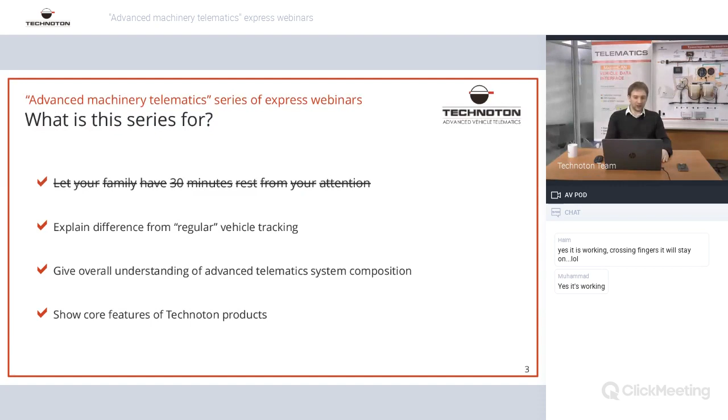Again, I don't know what's happening with this, probably this delay is due to internet connection. So briefly, I'll go through the Technoton company. A few words: Technoton was established in April 2000. Later this month we're going to have our anniversary, 20 years on the market. That's quite a good period of time to be on the market, and hopefully later this year we will celebrate it. You guys are welcome to Belarus, welcome to Technoton, to see us, to have some talks, discuss some projects, and also, if possible, to have some fun together.

At this stage, at Technoton we have around 15 main product lines. Later on, this presentation will go through the main product lines. I don't want to talk about the accessories, because in total there are more than 250 items positioned in our product portfolio. At this stage, we are supplying products to more than 140 countries worldwide. At this moment we have 600 plus partners, integration partners, so-called. We're also attracting more interesting and sophisticated ideas from our partners to gain new targets, new projects together.

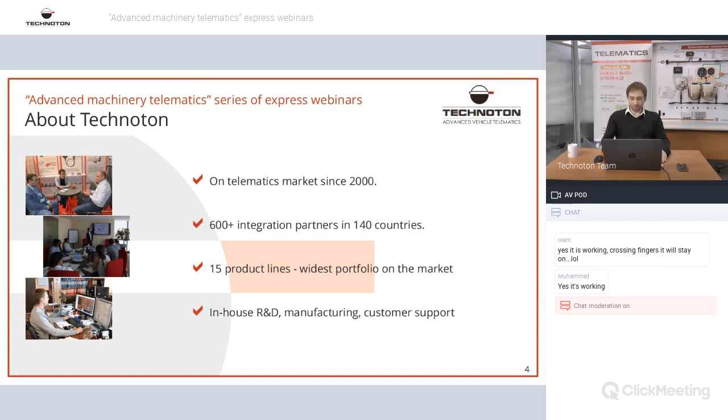Now let's talk a little bit about the different market niches, the current market niches that the majority of telematics companies and fleet management companies are targeting. That's mainly the market of trucks, market of vehicles in general. Some partners also enter diesel generators, cellular towers, some marine markets, more or less. But very few partners are doing really sophisticated and interesting projects that require more than standard tracking or geofencing. I suppose every company doing fleet management business does tracking, speeding, fencing, it's like a must-have, like air, it must be there. But we want to attract attention to other interesting markets, so-called advanced machinery telematics markets or advanced vehicle telematics. Later in this presentation we'll see what other markets, what other market niches I'm talking about.

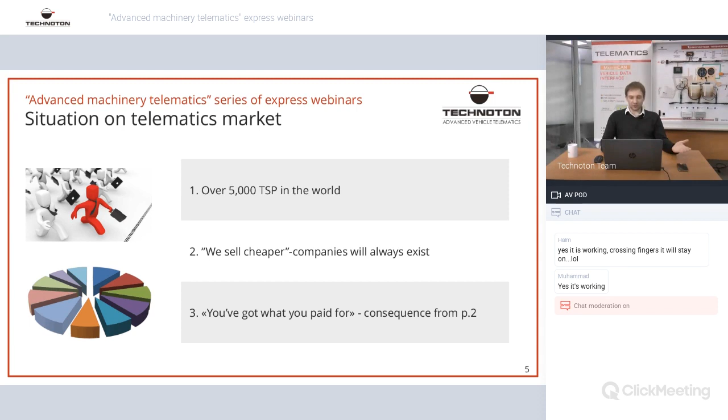So here you can see market niches that we also should consider, comparing to just the regular fleet management that usually includes tracking, maybe fuel level sensing, so tracker plus some simple fuel level sensor. We allow our partners to expand the system, to expand market niches, expand the product portfolios, and obviously expand possibilities to make more money and to make clients happy.

So here we can see on this presentation slide that agriculture market, railway transport, vessels, either river vessels or sea vessels. It's quite interesting market that's underestimated from our point of view, because we already done several successful stories on vessels. Imagine the vessel usually got at least two main engines to drive the vessel forward, but there are also additional engines for keeping different machineries running on the vessel, as well as diesel generators installed on the vessel.

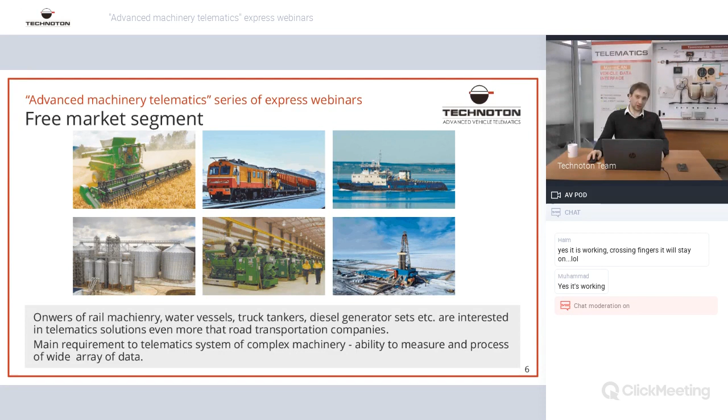So also you can see here different applications like granaries, where we can monitor moisture, temperature, consumption of the burners, etc. Interesting and huge market of diesel generators - you can see it here on a picture. Oil, gas and oil market, like here on a picture. So that's just a little part of the market that we're attracting our partners to enter together. This list is quite bigger than just on this slide.

Obviously, complex machinery segment is not easy from the first glance, and some of the partners, when they just get used to simple tracking business, they're afraid. They see like one engine, another engine, a lot of pipes, a lot of fuel tanks. They're just afraid - they don't want to even start any project there.

We are assuring you guys that with our help, we can make any successful project together with the help of our business development managers, with assistance of our technical team. Together, we definitely can make these projects run well. The 51%, I suppose, is just the worry, the client's fear. So when we pass this 51% of fears, then 49% is just success. Together, definitely we can work on these projects and make the maximum of that.

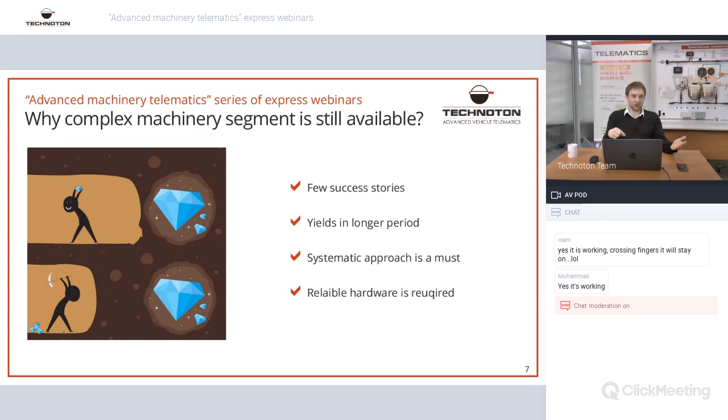And as I said earlier, the partner first needs to understand that it will require time, it will require skills, it will require a lot of assistance from our side, but we are always also open to help work on it together. Just because we see the potential, and a lot of market niches are just underestimated, and they're waiting for us.

I don't want to spend too much time reading or explaining, but there's a huge difference between advanced vehicle telematics and regular vehicle tracking. There are different targets, different goals, different scenarios of equipment, and different parameters that we can obtain.

Obviously that's a completely different story. Advanced vehicle telematics is like a spider net. There's one core unit, a so-called tracking device, controller, or terminal, that links multiple devices: fuel level sensors, fuel flow meters, temperature sensors, CAN bus, analog sensors, all connected to a single unit.

Majority of you are already working with some tracking devices from third-party manufacturers. That's totally fine. We are open to discuss possible integration of our devices with existing tracking devices that you already have. Please don't be afraid of that, and ask your sales manager if there's a possibility to integrate a tracking device from this manufacturer with your fuel level sensor and flow meter.

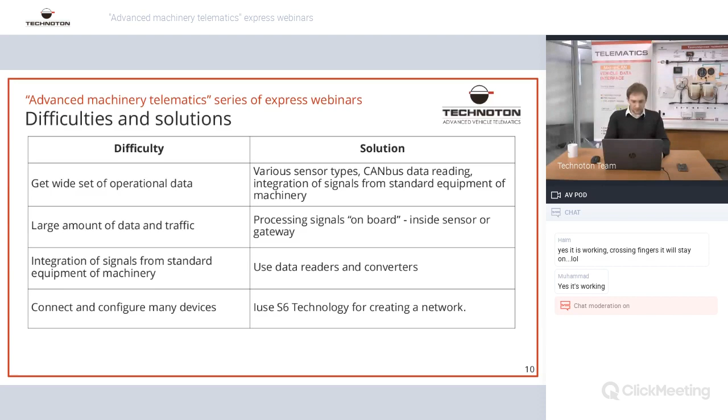As I promised at the beginning of the webinar, here you can see the pictures of our main product lines that we've been producing for years. Our main focus is the manufacturing and production of IoT sensors: fuel level sensors (DUT), fuel flow meters (DFM), contactless CAN bus readers, vehicle data interfaces, different kinds of converters, displays, etc.

Obviously we also do telematics devices, tracking devices, but that's an additional business, not our core business. We should follow the current trend on the market, see what's going on there, and make sure the equipment is running well.

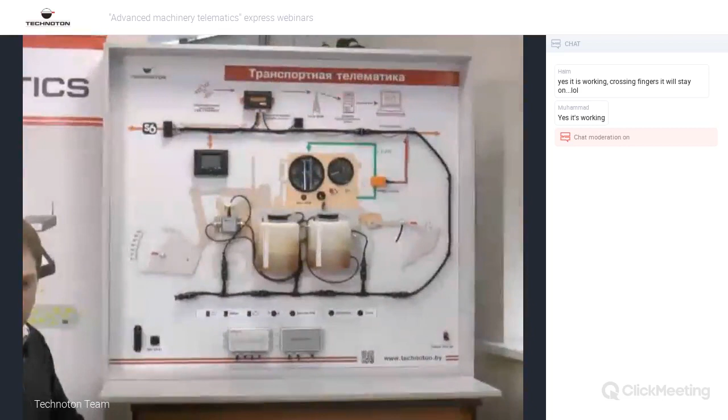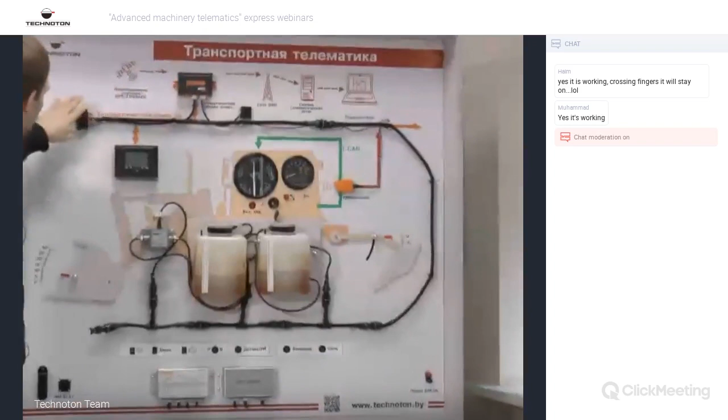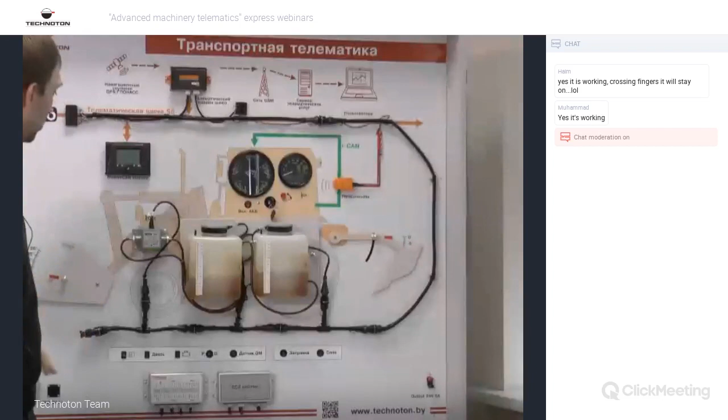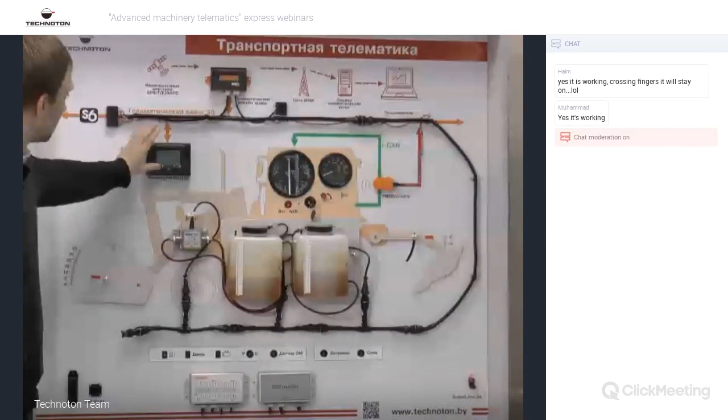Behind me on the left, you can see an example of the system we're using on a tractor. The core of the system is a gateway telematics unit, and we use a single CAN input on it, connecting multiple devices. On this tractor, we get data from the CAN bus using the CAN Crocodile reader, and we monitor fuel level in 2 tanks, and also get actual engine fuel consumption information, displayed for the driver if needed.

The idea of S6 technology is that we use a single cable to connect multiple devices together. No need to worry about the quantity of inputs on a telematics device. Either there's just one RS-232, or one RS-232 and RS-485 interface input, or a couple of analog inputs, and you're worried there's no way to connect more analog sensors. With the help of the S6 system and different converters, master CAN, we can connect multiple units to a single CAN input on a telematics gateway.

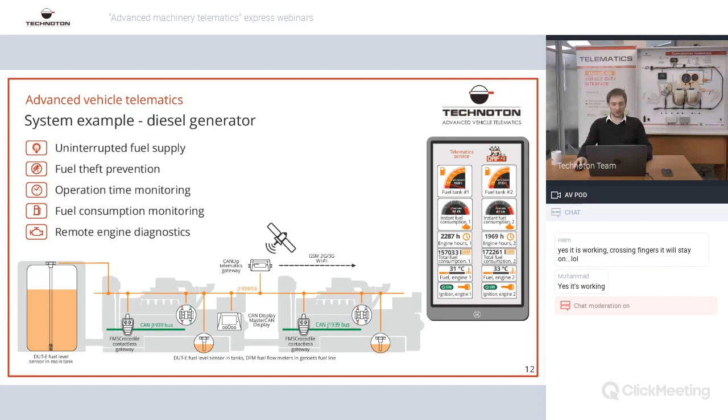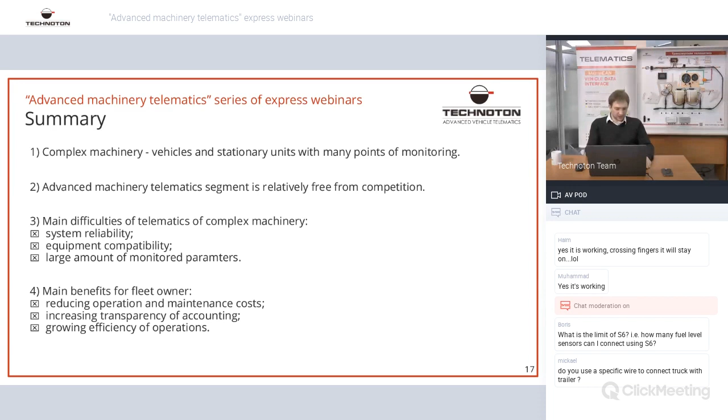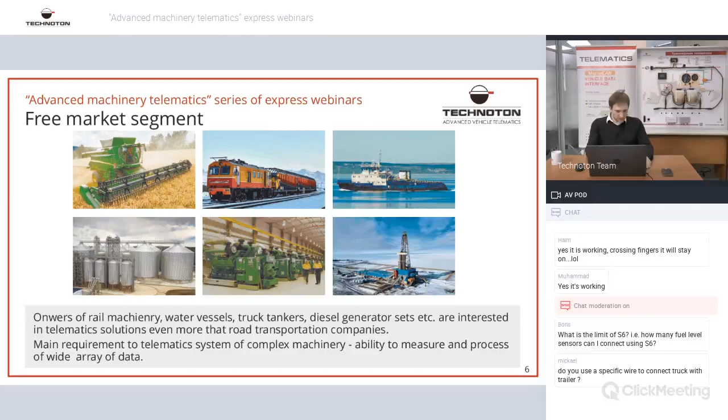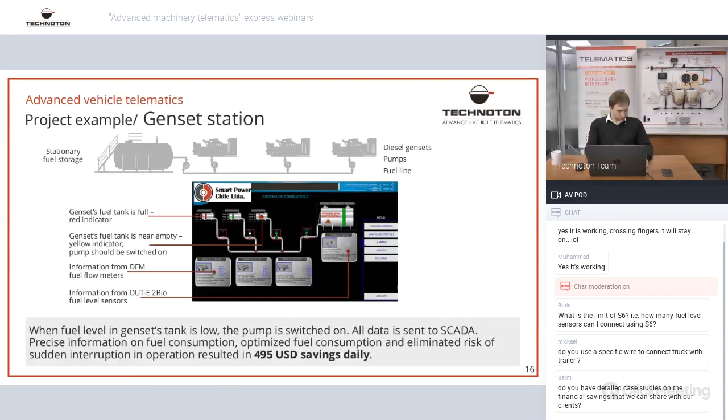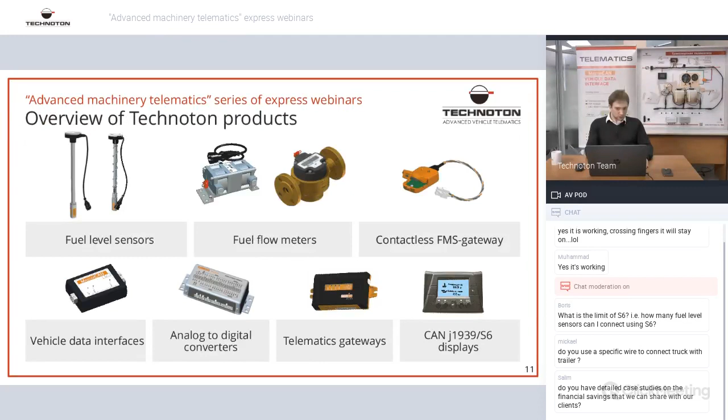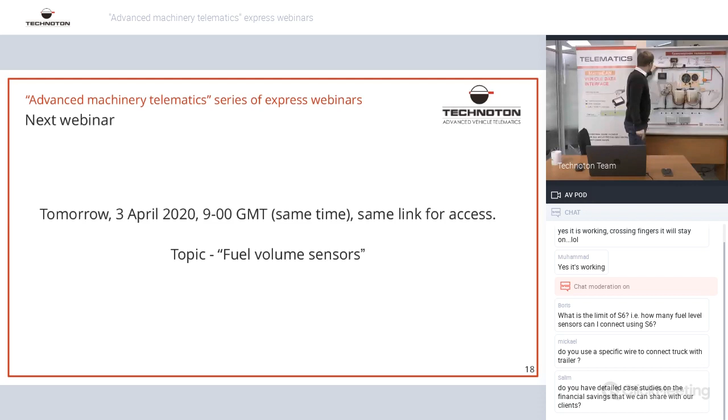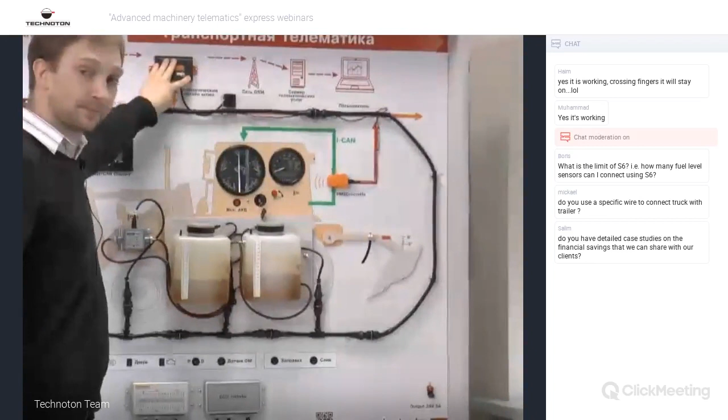So, S6 technology - we have a good example where we can connect multiple devices to a single input on a telematics device using a single cable, using different splitters and T-connectors. We link it with a single CAN input on a telematics device. The idea is that each device gets a unique network address, and the Telematics Gateway identifies them as different devices.

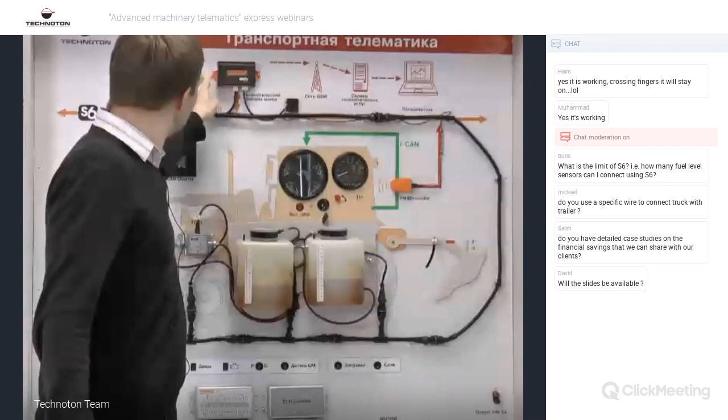IoT Edge technology is more about processing data inside the device - inside, let's say, the fuel level sensor or flow meter. So, to keep it short, raw data comes to the device, and just the useful parameters are sent further to the web server. S7 technology is all about wireless BLE sensors.

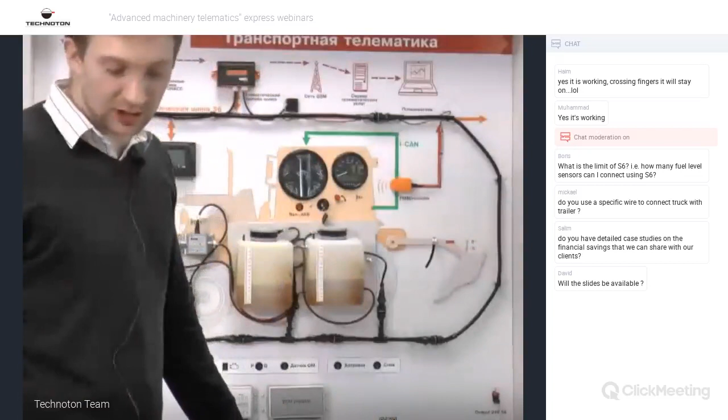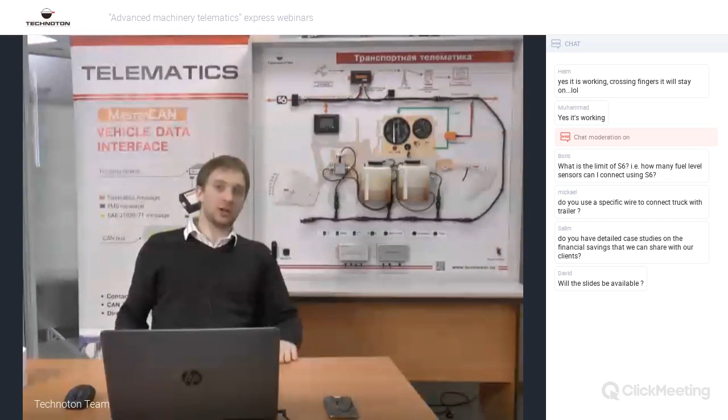Yeah, that's just briefly, and I hope you guys still can see me and hear me. So, hope the idea of this introduction webinar is clear, and we are open to answer any of your questions.

My colleague will assist me with this window to check all the questions that you are sending us.

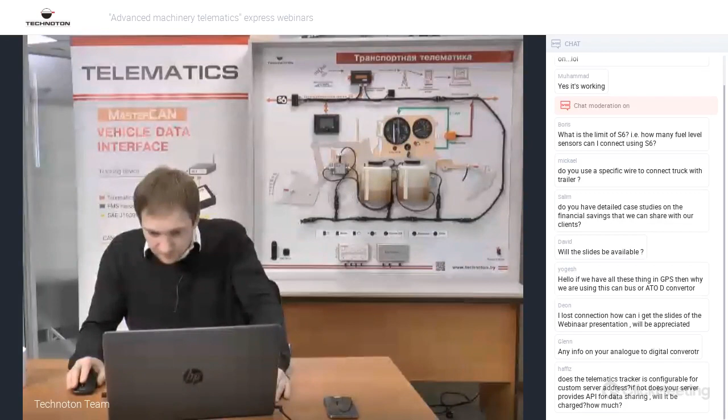Thank God, I can see all your questions, I suppose. I see some of the questions - let's go through the most interesting ones.

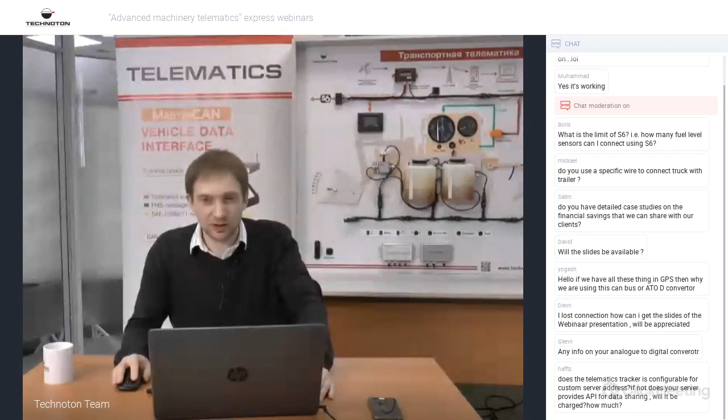Questions from Boris: what is the limit of S6? How many fuel level sensors can I connect using S6? Actually, at this stage we can expand the S6 cabling system quite a lot - we already tested a 250 meter system on a vessel and it's working well. The limitation on fuel level sensors at the moment is 16 - imagine a fuel tanker with 16 compartments. Frankly speaking, I haven't seen a single fuel tanker with 16 compartments - maximum I saw was 12.

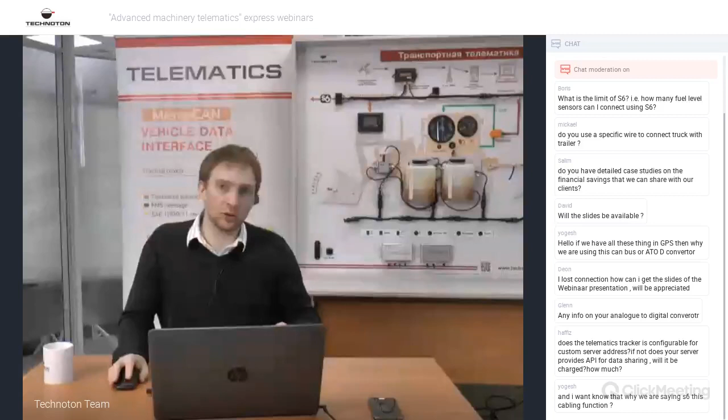Do you use a specific wire to connect truck with trailer? Yes, Michael, we use an S6 cable. There are 5 wires in the S6 cable: CAN high, CAN low, VBAT, ground, K-line. That's 5. So between the trailer and truck we also have a twisted cable for that.

Salim asks: do you have detailed case studies on the financial savings that we can share with our clients? Dear Salim, we do have some financial ideas, some cases based on our partners' case studies. Some of them we can share with you.

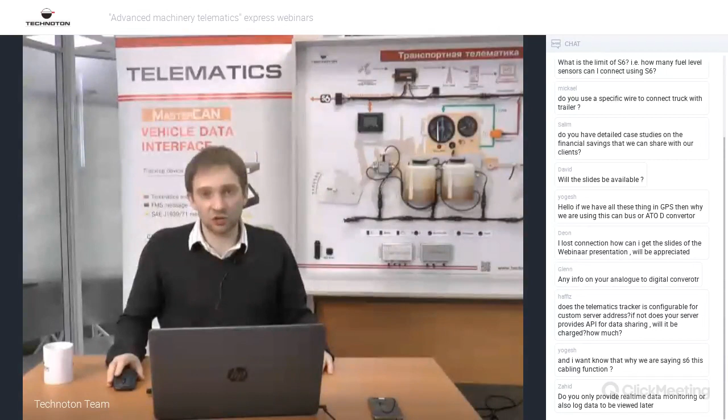David asks: will the slides be available? Dear David, I'm sure the slides will be available.

Mr. Yogesh asks: if we have all this thing in GPS, then why are we using this CAN bus or A to D converter? Yogesh, I'm trying to understand exactly what you mean - A to D converter, the things, if we have all the things in GPS, then why are we using this CAN bus or AT...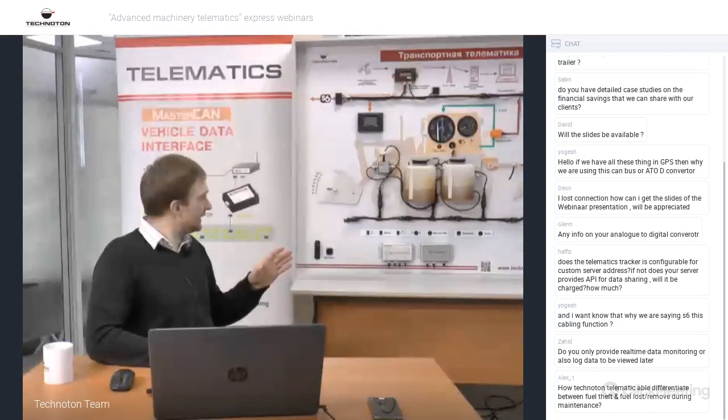Well, let me just explain a little bit more about S6. S6 is a digital interface based on J1939. Obviously, on the machinery there can be different analog sensors, and we cannot directly connect those analog sensors to a CAN input. That's why we have different converters, so-called Master CAN DAC15 or Master CAN DAC2113, to convert analog values into CAN.

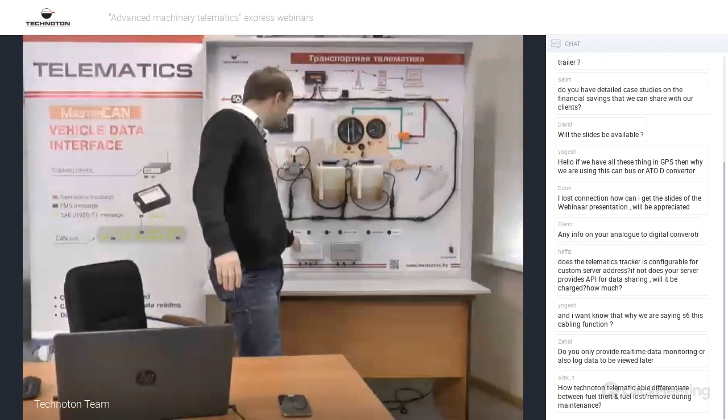Mr. Deon asks: I lost connection, how can I get this slide? A webinar presentation will be appreciated. Okay, yes Deon, we will send you a presentation if needed - so just please post your email address.

Glenn asks: any info on your analog to digital converter? Yes, it is available at our document center - you can log in there and get the needed operation manual.

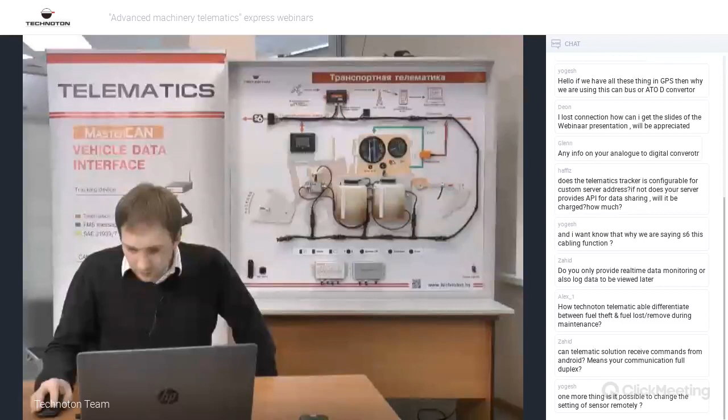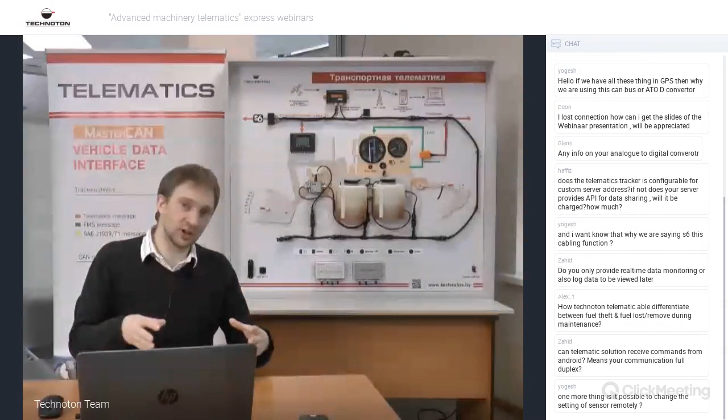That's a good question, Alex. Indeed, when it comes to data analyzing on a web server, we need to analyze the event. Let's say you're getting a fuel filling or draining event, but you need to understand exactly whether it's a filling event or a draining event. For that purpose, we always recommend analyzing the time frame, whether the unit is moving or not, whether the engine is running or not, whether there is good power supply. So in general, we need to analyze the situation from different angles. After that, we can say for sure there was fuel theft, regular fuel consumption, or something else.

Rashid asks: does any model support multiple fuels - petrol, diesel, jet fuel, or kerosene? Dear Rashid, please clarify your question.

Antoine asks: how are the S7 DUTs performing in the field? It's performing well, what I can say. I understand what you mean, Antoine.

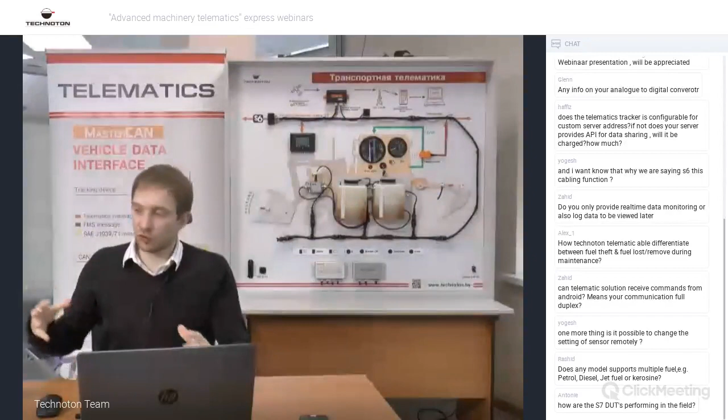DUTS-7 is a wireless sensor that communicates based on BLE technology. So as we say, no wires, no problems, but obviously there is a range limit from the DUTS-7 to the recipient. If we're planning to use DUTS-7 on some application where there are a lot of metal walls, we need to test if the signal will reach the recipient. So when it comes to locomotives that have a fuel tank somewhere underneath and telematics units installed in the head of the locomotive, they can be 10 or even 50 meters apart with a lot of walls in between. Here we cannot tell you for sure there'll be a good connection between the DUTS-7 unit and telematics device. It should be tested to see if the signal is reaching or not. To be honest, for this kind of application, for locomotives, we recommend using S6 devices - for example, DUT-E 2Bio CAN or DFM CAN, so we can lay down a cable and have 100% connection.

Rashid: we want to install sensors in oil trucks which supply fuel to fuel stations. Sometimes it carries diesel, sometimes petrol or jet fuel. Dear Rashid, that is an interesting project. We'll be glad to analyze it. Please contact your sales manager, contact person at Technoton, and he will assist you with everything. We'll analyze the oil trucks case. Definitely you will be asked for additional information because, as I said earlier, this kind of application requires a lot of research.

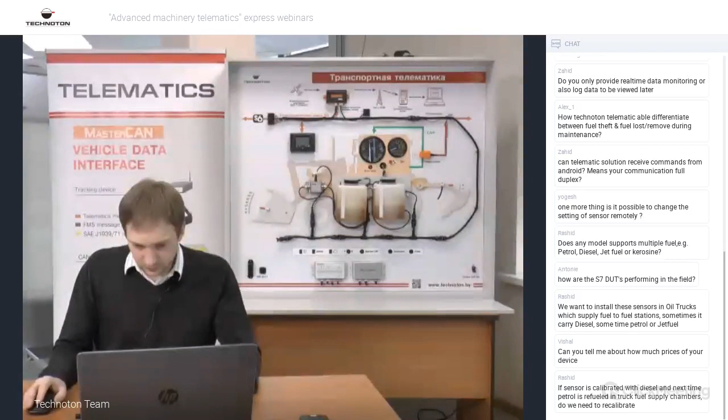Okay, other questions? Dear Vishal, in regards to prices, please contact your sales manager. He will assist you with that.

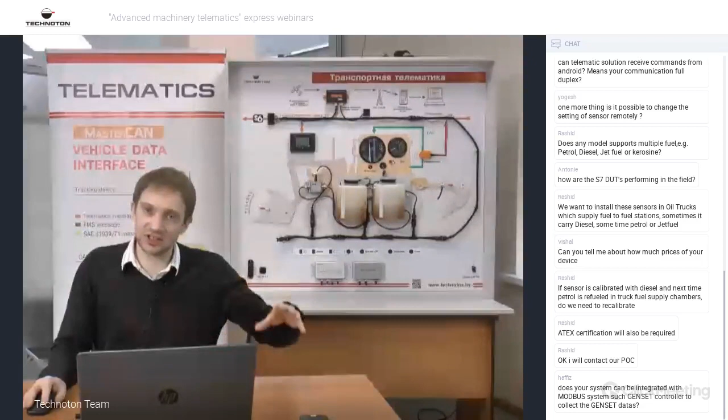If a sensor is calibrated with diesel and next time petrol is refueled in the truck fuel supply chambers, do we need to recalibrate? Dear Rashid, I understand, yes, sometimes a fuel tanker can carry different fuels - today diesel, tomorrow kerosene or some other liquid. It's quite a normal situation for the fuel tanker business. For this kind of application, we recommend using DUT-E 2Bio CAN. At the first installation, we calibrate DUT-E 2Bio CAN on one fuel - let's say diesel - only one time, the right way. In the future, if something else is poured into the compartment, DUT-E 2Bio CAN will automatically adjust its settings inside. So you'll be getting the right fuel level data no matter if it was diesel before and the sensor was calibrated on diesel, or now it's used on kerosene. The sensor will adjust its internal settings and you'll get correct information about the fuel level.

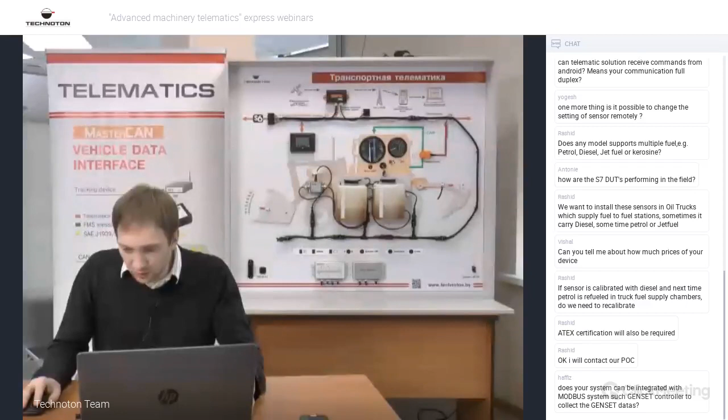Rashid asks if ATEX certification will also be required. Rashid, indeed, our DTS-7 sensors are X-proof, and you can ask your sales manager for the certificate, or you can find it at our document center.

Got more questions. Does your system integrate with Modbus systems, such as genset controllers, to collect genset data? Dear Hafiz, yes. Recently we developed a converter that can obtain information from Modbus and convert it into CAN. So it can be used together with our sensors - for example, you get different parameters from the Modbus of a diesel generator, and you can join it together with our S6.

Okay, I'm searching for more questions. So guys, please write your questions here. I'll be glad to answer.

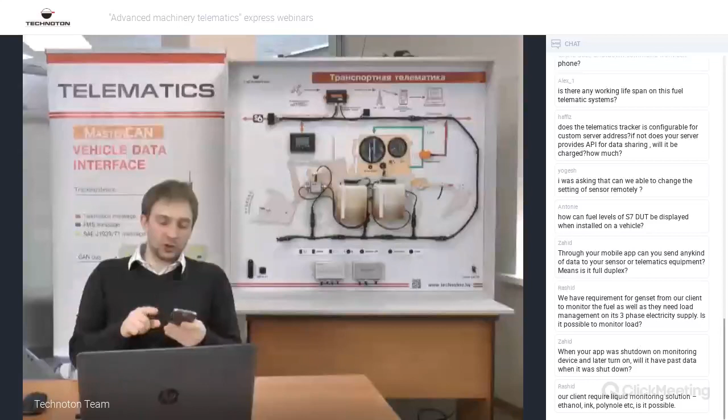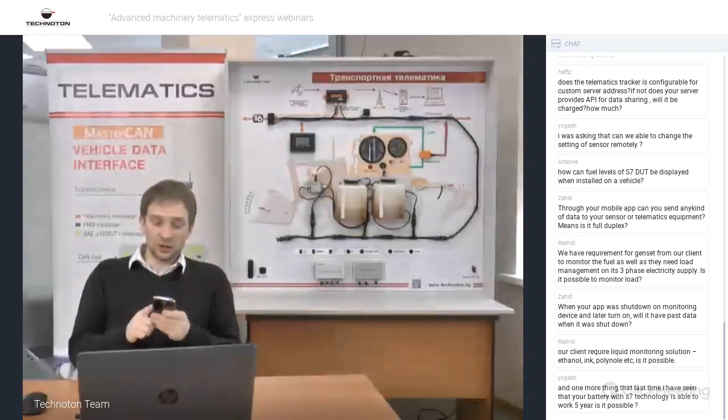How can fuel level sensor DUT S7 be displayed when installed on a vehicle? DUT S7 communicates based on Bluetooth 4.X technology, so it can be either connected to the telematics device that supports Bluetooth 4.X, or at the same time connected to a smartphone. You just need to go to Google Play Market and install the appropriate application. So you can also get fuel level information there. At the same time, where it can be useful for a fleet manager, let's say in the morning walking around the fleet and checking fuel levels, having no access to the web server for some reason, and also later on you can check on the web server. So it's quite flexible.

Okay, more questions. Zahid, through your mobile app, can you send any kind of data to your sensor or telematic equipment? Means, is it full duplex? Can you please specify exactly the sensor you're talking about, then I'll answer your question.

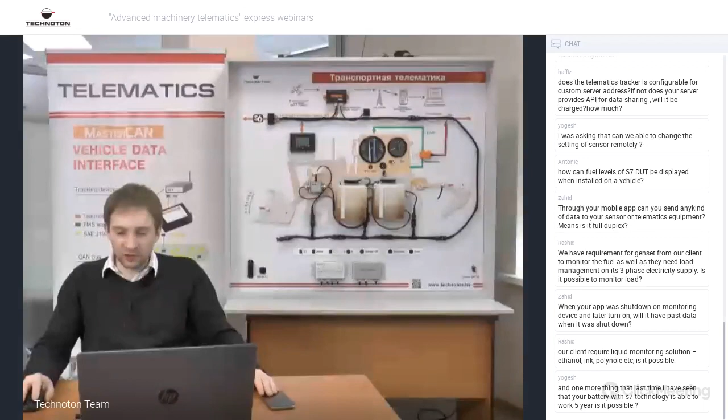Rashid, we have a requirement for a genset from our client to monitor the fuel, as well as they need load management on its three-phase electricity supply. Is it possible to monitor load? Rashid, it's an interesting case, and definitely we would like to study that. We already have been working on similar projects before, so our sales manager definitely will share their experiences.

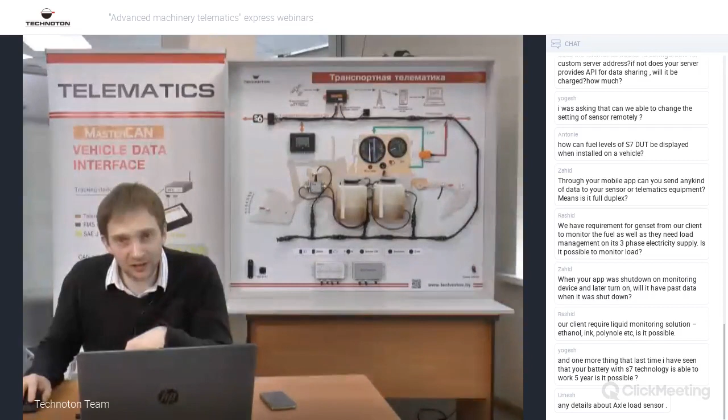More questions. When your app was shut down on the monitoring device and later turned on, will it have the past data when it was shut down? Dear Zahid, yes. If you're talking about the web server, yes, you will get that data on the web server, even if there was no connection. If we're talking about the smartphone and DUT S7, in this case we won't be able to see what's been happening during the time there was no connection. But the good point is that the system will see if before losing the connection there were, let's say, 500 liters, and after some time, when the connection appeared again, you see 400 liters, the app will generate a notification: 100 liters of fuel disappeared.

More questions. Our client requires a liquid monitoring solution for ethanol, ink, polynole, etc. Is it possible? Dear ladies and gentlemen, please note we offer solutions for monitoring different kinds of fuels. So the fuel level sensor DUT can be used for monitoring any non-conductive liquid. Non-conductive liquid, no water, kindly note that.

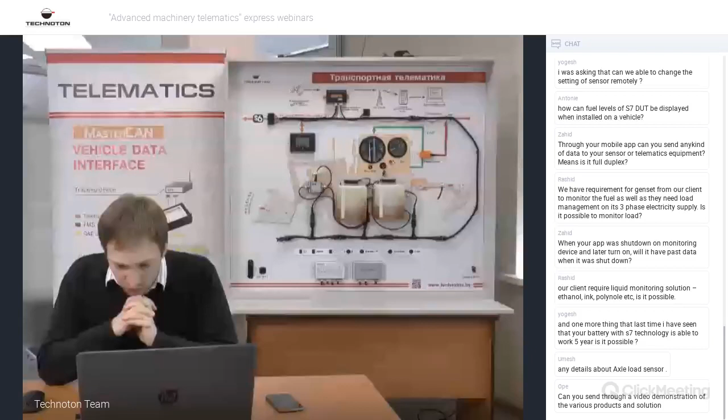More questions. One more thing, last time I've seen that your battery with S7 technology is able to work 5 years. Is it possible? Dear Yogesh, yes, that's right. We claim warranty for the DUT S7 battery of 5 years, minimum 5 years. The manufacturer of the battery claims 8 years, so we are realistic people, we give 5 years.

Umesh, any details about axle load sensors? Dear Umesh, there is information about axle load sensors on our website. Also, you can find more information at our document center. If you just visit our main website, www.technoton.by, there's a documentation tab. Please get registered and you will find everything there. Also, you can ask your sales manager.

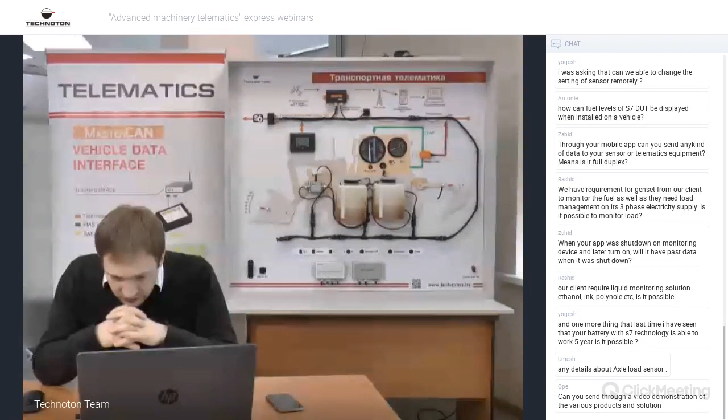Mr. or Mrs. Ope, can you send through a video demonstration of the various products and solution? Dear Ope, I suppose that's a joke, right?

Will you tell more about individual products tomorrow and next week? Dear Boris, yes, we will continue our webinars later today in Spanish and French languages, also all this week and hopefully all next week, talking about different topics, different products, different applications, and we will be open to answer any of your questions.

Yogesh, do you have any video demonstration for the CAN bus installation? Dear Yogesh, kindly specify what exactly product you're talking about. If you need a crocodile reader video installation, please visit our YouTube channel, there are some videos there.